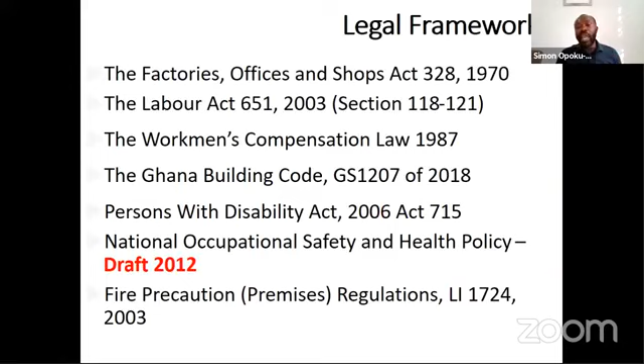So we are looking at that as being a basis for health, safety and environment in the country, where every company, every organization would comply. Yes, it's common law, it's statute law, and all that legal stuff.

It is your duty to provide a safe environment if it's a construction site. You also need to provide the safer plant, whether you hire or you own. And the systems and the working arrangements in terms of training, inspections, working patterns, and all that has to be thought through, because it is your duty.

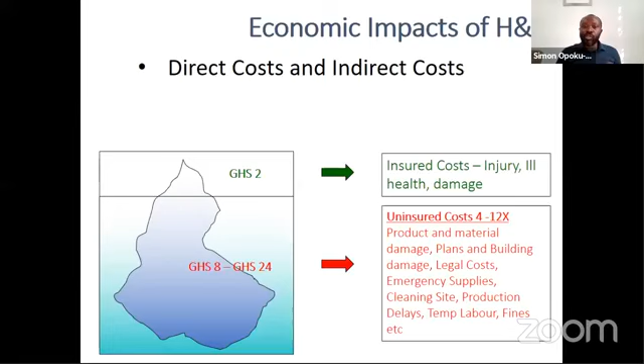So all these are part of it. In terms of the social cost, of course, nobody wants to work with a company where they will go and get injured. People will not feel happy, the morale will go down, and then you get people not participating or coming to your site regularly because they don't feel safe. As I mentioned, the corporate image, loss of reputation.

And just look at this from the business point of view: to promote effective incentives to improve health and safety within the organization, the cost of injury should be made economic, internal, variable, and routinely visible.

What we are all saying is that if we put this into our management, or if we look at the cost of injury as a basis for doing health and safety, it will help us to put this across if we are not senior managers or we are not the guys who make decisions.

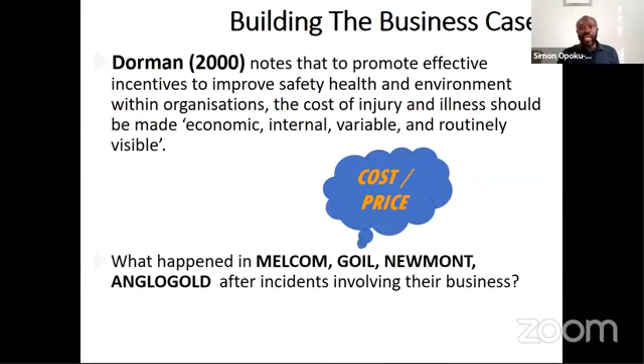And incidents that happen - Melcom, Newmont, GOIL - all these incidents had a lot of cost. And there was an incident in AngloGold where somebody died because they didn't put in place the good systems, and the court awarded 9 million Ghana cedis. That's a lot of money even if you put it in dollar terms.

And this took about 5 years to happen. Even though it was long and somebody died, and we don't want anybody getting killed on our site - how many companies will survive if they are supposed to pay this amount of money? And so it's something we have to look at.

If it gets to a time where a lawyer can pursue you because somebody has died on your site, or somebody has died as a result of your design, then this is something we have to look at.

It's also a business case we need to look at, because it's not only about chasing money or maximizing profit, but the importance is that we need to be able to avoid losses. And if you avoid losses, it means you are not taking money away and you can still make your money.

What is the goal of designing for health, safety and environment? The goal is that as a contractor, business owner, firm, engineer, or architect, how do you make sure that from day one, as you start thinking about your design, it is going to be a life cycle and sustainable objective, such that the emphasis is that your permanent design feature should eliminate or reduce hazards.

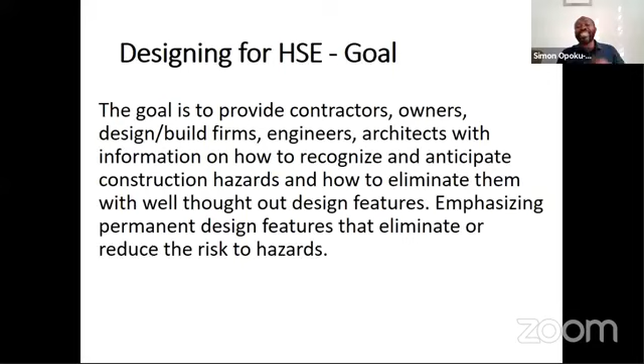And the hazards occur at pre-construction stage, construction stage, after construction when people are occupying your building, and as far as demolition. So we are looking at a process whereby you try to eliminate, let's say, falls. We'll go through the process where we know that falling from height and falls on a construction site is one of the biggest, or is the majority of accidents that happen on site.

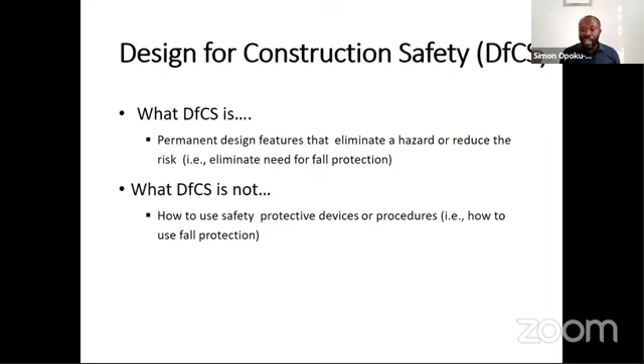So how do you make sure that the features that you put on your building or your design would stop somebody falling during construction, will stop somebody falling at the maintenance and repair stages, as well as will stop somebody falling when we need to demolish that property, maybe 20, 40, 100 years down the line when you are not even alive. But designing for construction safety is not about showing somebody wearing protective gear or PPE. Let's understand the various elements.

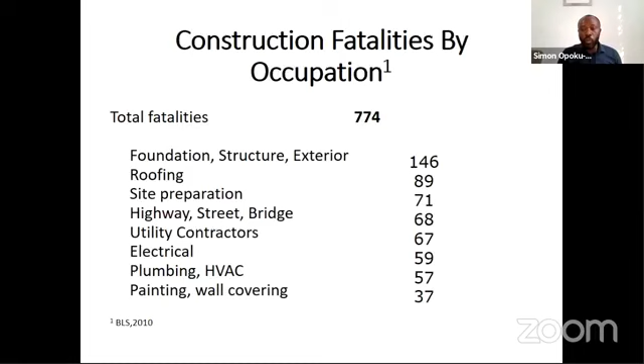So for conventional construction, design professionals prepare the plans and specifications to show that the building complies with the building code. So we have a code, and then we design such that we will be in compliance with what the law says we should do.

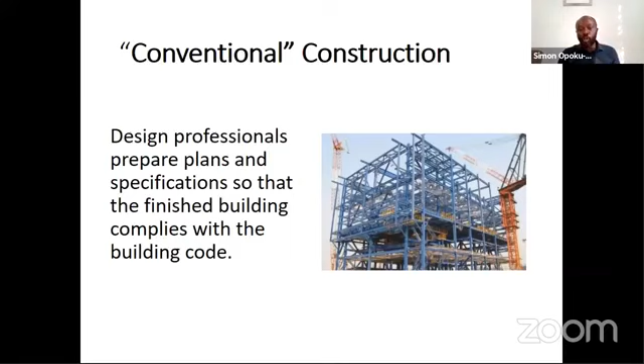Hazards are managed during the construction process, but little thought goes through the process after the owner takes possession. So when we design and build and hand over to the end user, the estate owner, the facilities managers, the company paying for your designs and construction - little thought goes through what happens afterwards. And I'm saying this with respect: every single hazard that happens after your design has been built can be stopped or avoided if you think about it.

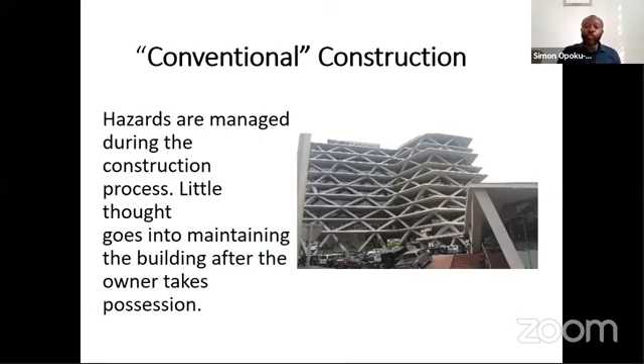So for a typical construction arrangement, the owner will contract various contractors. The entities would then either subcontract or give some of the work to various specialities. The project owners would contract some design firm to do both design or construction sometimes. The project will move fast and safety responsibilities are often blurred or neglected. That is the situation that we have here.

And so for a designer or architect, if you have already thought through safety in your designs, that means that every single specification, from procurement to all the various aspects of your design, would put responsibilities to specific people when we are on site. The process is addressing site health and safety and planning for future maintenance in the design phase of the project.

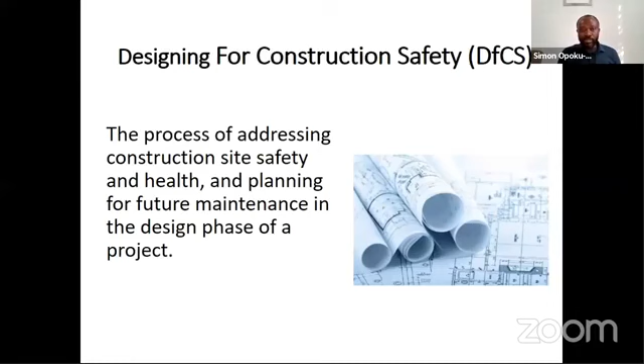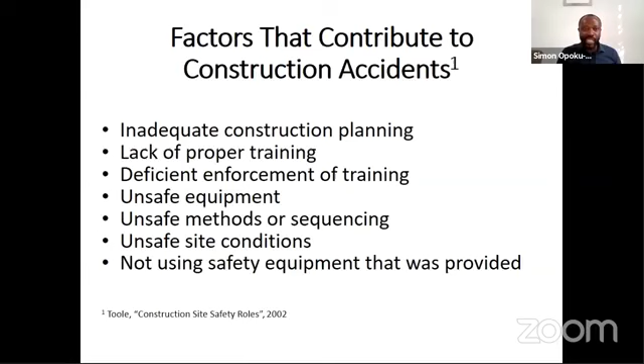Some of the factors that contribute to accidents on construction sites are these, and we need to understand when we talk about training and methods and unsafe conditions, because it is us. And if I say us, I'm talking about the design team, the architects, the people who lead projects. They have the bigger responsibility to make sure these factors are curtailed or eliminated very early in the stage. Where do we fit?

Considering safety issues related to construction maintenance facilities, designing out anticipated hazards. So you meet a client and the client is asking you for some things that are sometimes unbelievable. The way I see architecture and design, anything should be able to be built if we're able to put the various technology together.

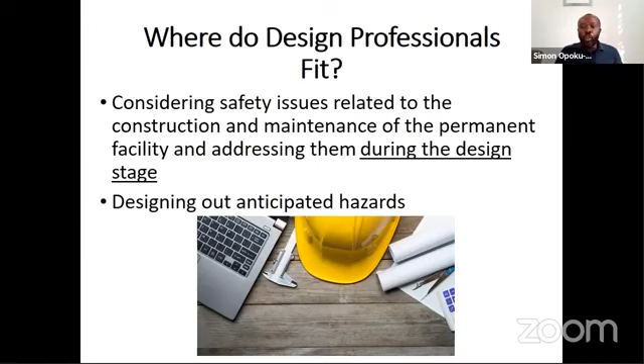But in that same vein, we need to look at how we can design out any hazard that can come from pre-construction, construction, maintenance and repair, and the demolition stage. So your job is to design out any anticipated hazard. And you can only do that when you involve safety professionals, or somebody within your team who can anticipate these hazards, review your drawings, and then you can design it out.

So these are the phases that I want us to look at: the pre-design stage, concept, design, development, construction documentation, construction stage, and project review.

If you break it down, you can see that you develop, you design, you construct or manufacture, you supply, you install, you commission, and you use it.

After it's been handed over to the end user, your job doesn't end there if you have thought about it, because these buildings and facilities are going to be maintained. Some of the reasons why most of our buildings in this country struggle for the look and feel, or how people see a building that is built very nicely and within 5 years we can't even maintain it, is because we did not think about the maintenance.

And every time we keep saying maintenance culture, it starts with architects, it starts with designers. If you think about how this building is going to be maintained, your choice of materials would be thought through and it will be chosen.

It will take some time, but every building at a certain point in time is going to be decommissioned, such that eventually we might have to demolish it because there is an activity, or because we want to change the area or whatever it is, or we have to do something to it.

At that particular point, you have to think about the materials that you used maybe 150 years ago and its effects whenever there's going to be a demolition, because the particles are going to be generated and it might be harmful to people at that time.

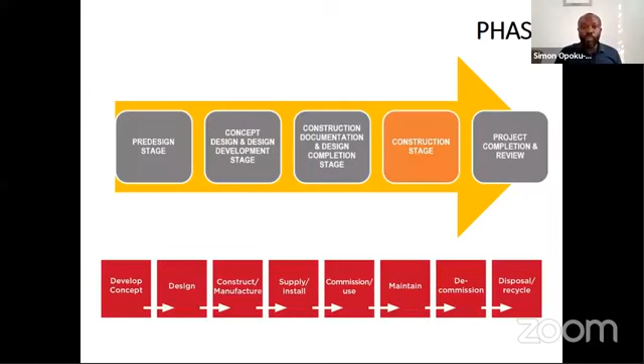So we've talked about this. We want to eliminate hazard. We want to design structures so that during the modification stage, we will look at how things could be done properly. Design output includes hard copy and electronic drawings, details and all that scope.

And specifications are very important, because when you specify, they will build it. That's one thing that you guys have control over. If you mark the line, if you specify, they will build it, as long as there is monitoring and oversight.

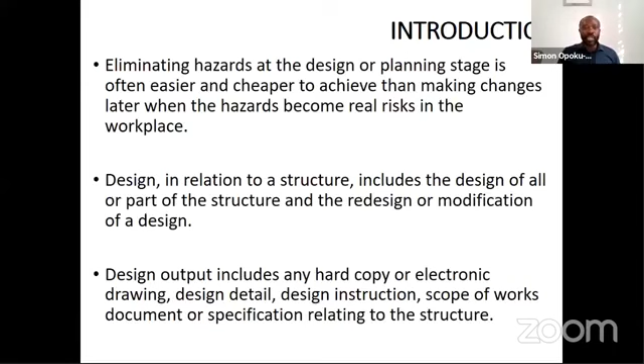What are the benefits of all that we are talking about? More effective prevention of injuries, improved usability of structures because people will be able to adapt, improve productivity, reduce cost, better prediction and management of production, and then innovation.

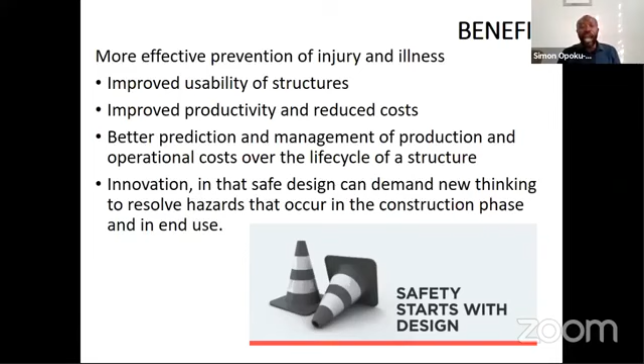This gives us an opportunity to innovate and start thinking outside the box, because the very few times that I've presented this to a group of people, it gave them the opportunity to look at how they do their designs, because every single line, as I've said, would be reviewed and it will be checked for safety and how you place your spaces.

We've gone through this - who is a designer? I remember back in the days we started off as BSc design, and then we ended with a BSc architecture. But the design profession is not only for architects or people who hold the pens and the pencils. We are looking at anybody whose decisions and ideas and activity affects what we build.

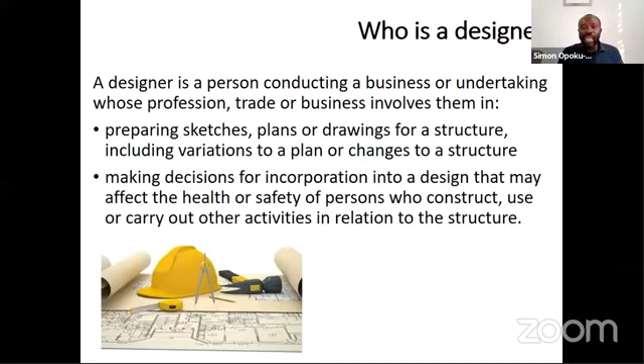So procurement entities, quantity surveyors, any single person who has an input in that process is a designer. And so we should be mindful of that.

So if a client were to propose a specification for, say, an installation which involves installing a component that has a high risk, that was reasonably practicable to adopt.

This is a scenario whereby your client is asking you to do something whereby you know very well that it is risky, the hazards are high, it will not be good for the environment in the long run and all that stuff. It is your duty, and I'm saying this again, it is your duty, your integrity, your values, your ethics, to be able to not just chase the money, but to be able to advise and encourage this client.

And every single time I speak to my colleagues and my friends, architects, this is something that we are battling with: how do we encourage and compel our clients, not looking at whether the client will go away, if we can design to solve the real problems in our society?

If we as architects and as an association can look at that as an area where we have a challenge, then our industry will be good. People will start trusting architects again and see that our job is very important. So it's our duty to tell the truth and encourage our clients—some very difficult because they hold the money—but to let them know this is what has to be done, this is the right way. If you don't want me to do that, I'm not part of your design team. Can we do that? That's the question we need to ask ourselves individually.

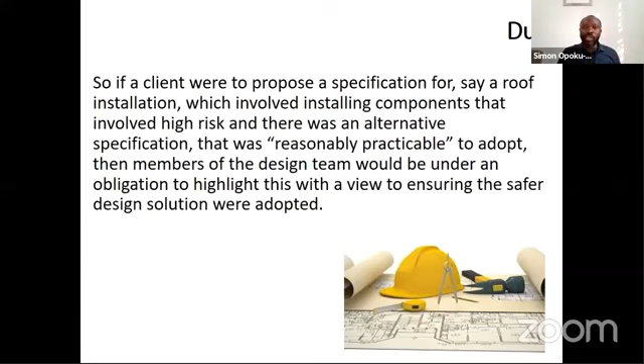So we are all thinking about the life cycle—planning, construction, and maintenance. It's a life cycle of your design that is very important, because in the end, even if something happens, look across. I'm in Kumasi, and if you guys have been there, come and see the type of building that's going on.

Without people knowing whether architects were involved or not, they are blaming architects. And I can't shy away from it, because from the legal point of view, or from the standards, or whatever the Metropolitan Assembly has made us aware, before a building can be approved, there is always a stamp by an architect on it. So unless I am wrong, with my opinion, every single building in this country that has a permit has been approved by an architect. So we cannot take ourselves out of the system.

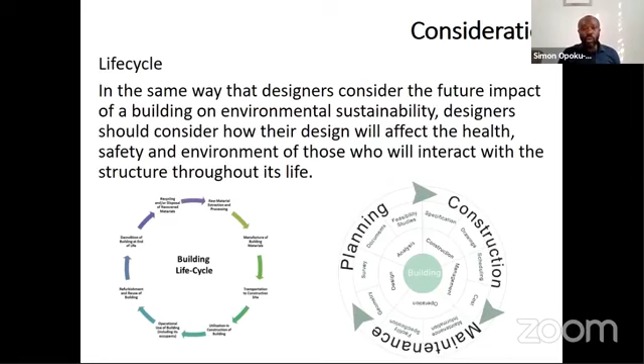But that is another challenge the Ghana Institute of Architects has to pick up within their long-term goals. At the pre-design stage, we look at consultations and research, identifying the purpose of the structure, the risk, how the design and its discipline, the competencies and people involved, the roles and responsibilities, and how we establish relationships with clients and others who influence the stage. So before you even start thinking about what you want to put on paper, you need to consult people whose designs will be affected.

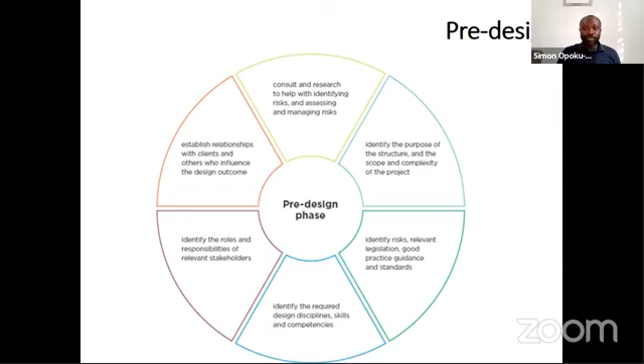I know this gets done, but here we are talking about how you bring people who can understand safety and the environment into your design team so we can design for safety. So we think about the design and its intended process, materials to be used, methods of construction, maintenance, operation. Even before you design, you have to think about how your design will be maintained, demolished and disposed of.

That's what I keep stressing, because that's all this is about. There are so many accidents and incidents on buildings and facilities because we did not think about how this is going to be maintained or disposed of if we break it down. So we talk about establishing the context, identifying the roles, and conducting consultation and research so we can identify these hazards and assess the controls.

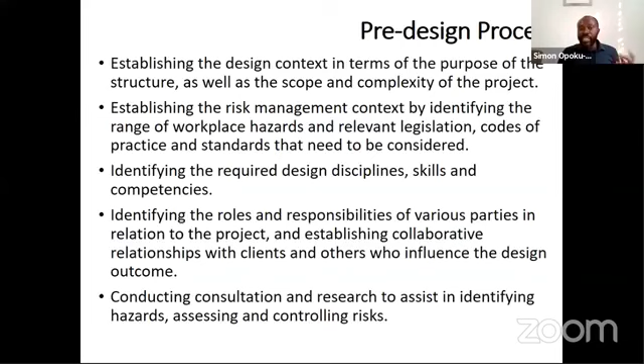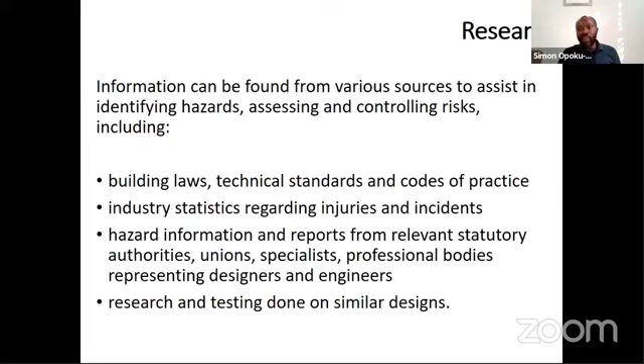In terms of consultations, we need to hold various activities that help us identify risks. When researching, there are laws, industry statistics, hazard information, and research. With the internet and journals across various platforms, we cannot afford not to be well informed about this subject, because it is being practiced in jurisdictions we admire. So if we want to set ourselves apart from other professionals, these are some of the areas we look at.

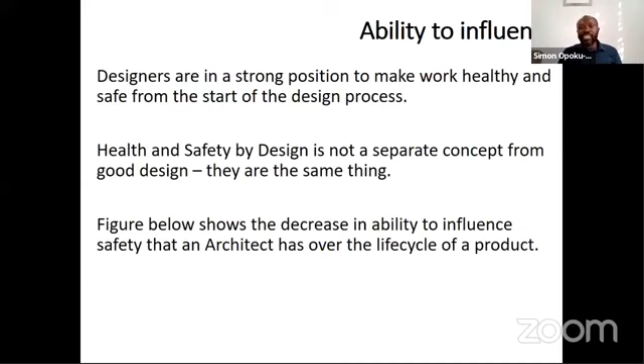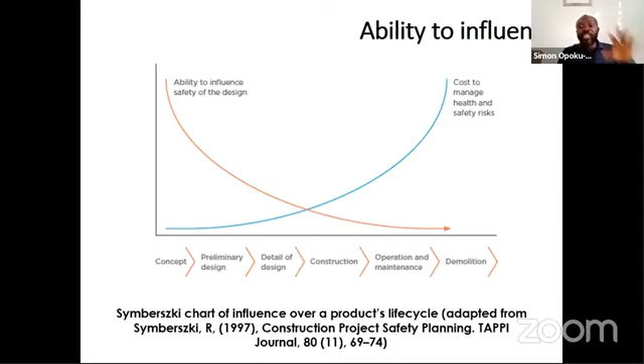The time you have the ability to influence keeps decreasing when the costs start going high. When it gets to the demolition stage, where you want to demolish this property which has been built over the years, if you are going to involve experts to think about health and safety at that time, your cost is going to go sky high because you've lost the ability to influence. So I keep saying, you guys have the strength, the power, every single ability to influence safety in the design.

So these are also some of the things we are looking at, and examples are that you are going to check the site. This is also something I want to mention: supposing a client comes to you, he or she has bought a site, and you know very well that this site is not good. What are you going to do?

We've seen people building in various sites and areas whereby eventually we keep saying it is flood prone and all that stuff. But these are designers and architects who are helping them build. We may say that sometimes clients pick their designs and just go and get their buildings done, but it is our responsibility to be involved in the process.

How are we going to make sure the dynamics of the family we are providing for is being thought through? Because people are going to get older, transition is going to come into place. If you put up a building with only stairways and no adaptability for when they get older, how do you make sure these people in old age don't need to climb these stairways and can still make use of their property?

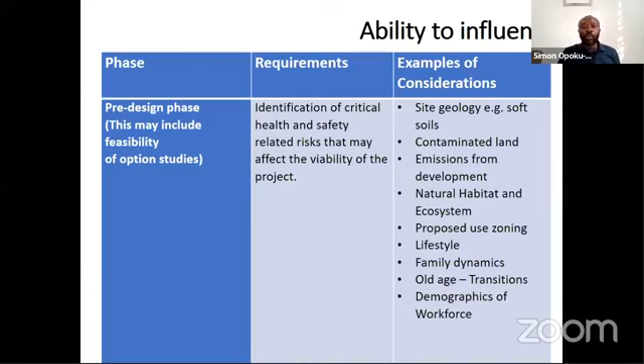These are some of the things we have to look at. If you are designing for a workplace, you need to understand the demographics and how your building can influence how people work, the procurement entities, the choice of materials, how we select our consultants and contractors.

How do we ensure health and safety design and expectations are being met? The materials we choose, the suppliers we choose - are we only going for the aspect of it being cheap or available, or are we going to think outside the box whereby our procurement and how we buy products and equipment can help us achieve this?

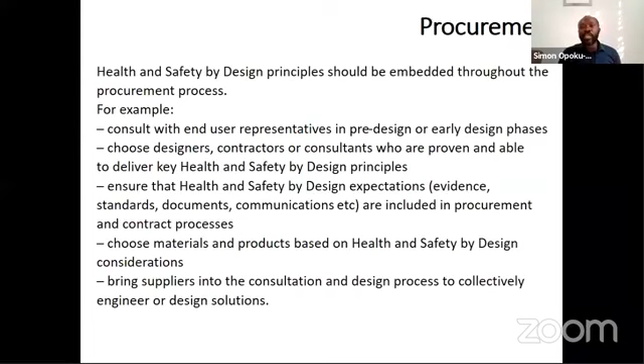We have to go through this risk analysis as well, and in that analysis this is where we can identify certain aspects of what we are talking about. It involves holding a lot of workshops and programs, on-site assessment, research, workshops.

And if we're able to use building information modeling, which has also been popular within these few years across the globe, it will make life easier, because supposing a design person or a safety person is within your project, every single action you take they will see it live, they will advise, and then we can take it off as the project goes on.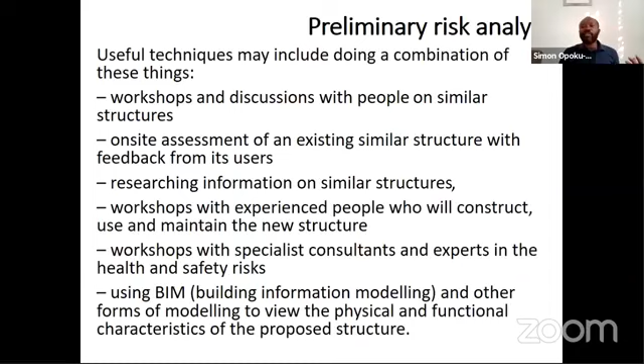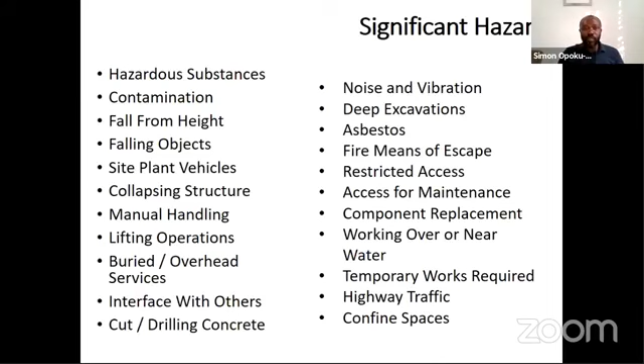Of course, design activities include setting up sites, and every single activity on this list would come up with a specific hazard, and these hazards would have to be risk assessed and then measures put in place such that we do not get accidents and incidents. I keep mentioning accident and incident because that is the resulting effect, and if you can identify the root cause at the early stages, it means we wouldn't get there.

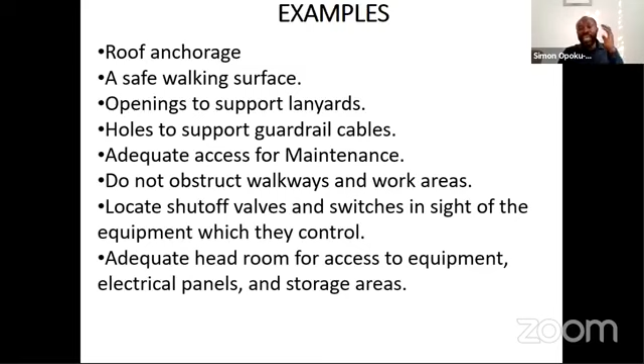Let's look at some examples we would be able to incorporate if we start thinking about this practically. So we will look at roof anchorages, safe walking surfaces, openings, and all that stuff if we want to be able to incorporate this. I'll go through - there are pictures which I'll show, which will list all these things.

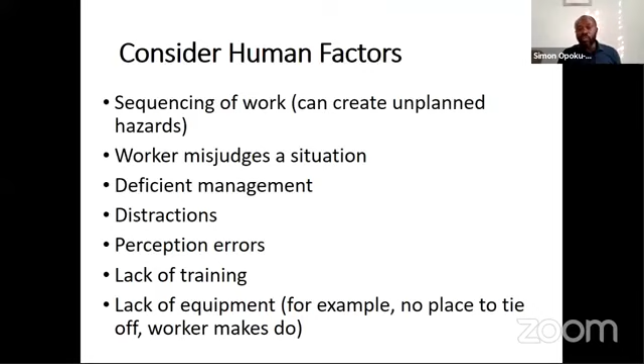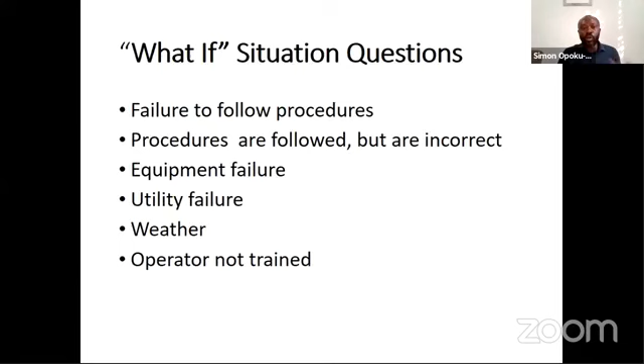So the first step is we need to identify the potential hazards, consider all the various human factors, sequencing of works, distraction, lack of training during your construction, and do a what-if analysis. What-if analysis will come up with failure to comply, utility failures, weather, and these analyses will also let us know, if we look at highway construction, what if workers have to access the drains?

How do we design that out? Are drains a possible confined space? If so, how do you design it out? What about the power lines? What about worker and public injury from traffic accidents? How do you organize your work and site such that you can design it out? Do trucks have enough turning space?

Because sometimes we force ourselves onto construction projects whereby these things happen and become afterthoughts. If we start thinking about it at this very early stage, then our construction will be environmentally, health and safety accredited. Will construction vehicles have enough shoulder space to be able to stop on the road?

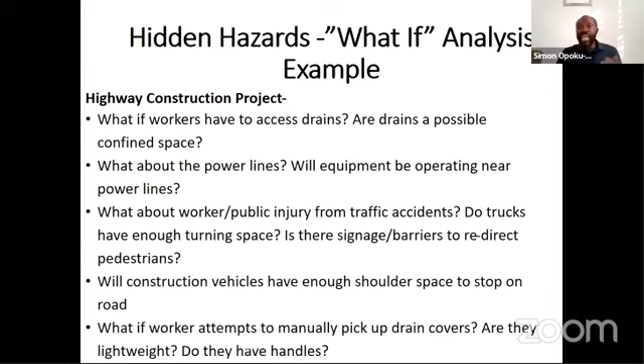What if a worker attempts to manually pick up a drain cover? We all know there's a lot of manual work that happens on our sites. This tells us that the choices and specifications we make need to consider the weight, where workers are going to hold it, and how the design is going to look. It may appear as if I'm asking so much from designers, but this is the right design. This is good design, because designing for safety is no different from good design.

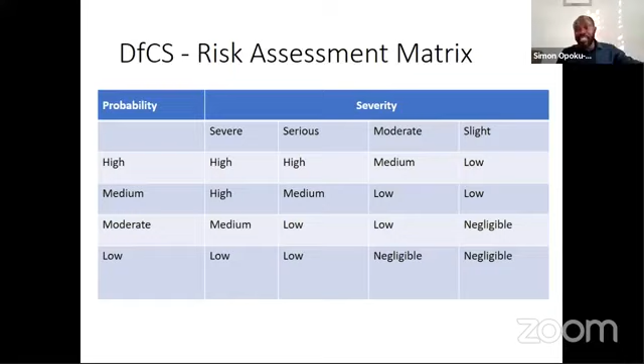We assess the risk, and we can assess the risk against the probability of it happening and its severity. All these modules that I'm talking about have their own specific courses that we can eventually go through when the time comes. And then you apply the hierarchy of control.

What this concept says is that at any point in time, if you can't design it out—so the first point is, every single hazard that you see, try and design it out. Use your initiative and innovation to kill out the hazard. Don't let it happen with your design. Design it out. If it is not possible, use something else. Find a substitute design. Think outside the box. Look at something else. If it is not possible, then you look at engineering controls.

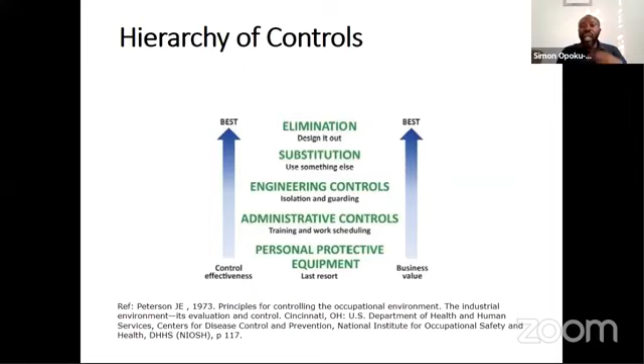How do you isolate the risk, or put in guarding measures? There's also administrative controls, where training and work scheduling can help. The last bit is PPE—personal protective equipment like high-vis jackets, helmets, safety boots. Over time, when somebody just provides staff with PPE, everybody thinks that's health and safety. No, it is the last bit that has to complement the four others we've talked about. So if you are thinking about PPE from the early stages, it means you are not doing the right thing. Try and design out the hazards before you give the person PPE.

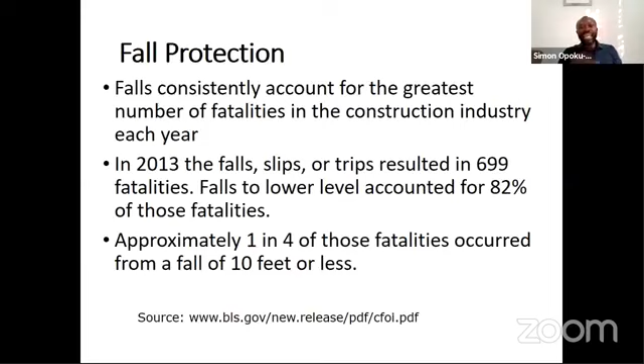So let's look at fall protection, which accounts for the greatest number of fatalities in the construction industry—the majority of people dying on site because of how construction involves going high or going deep. Whenever we talk of falls from height, people think it's only when the building is up. Not necessarily—if you excavate, once the excavation is deep, anybody on top of what we'll call the ground floor is also working at height, and they can fall into the excavation.

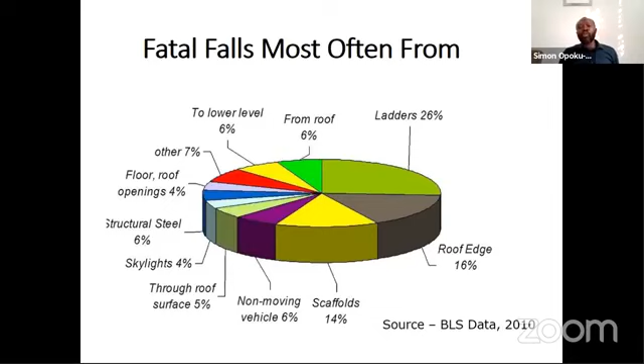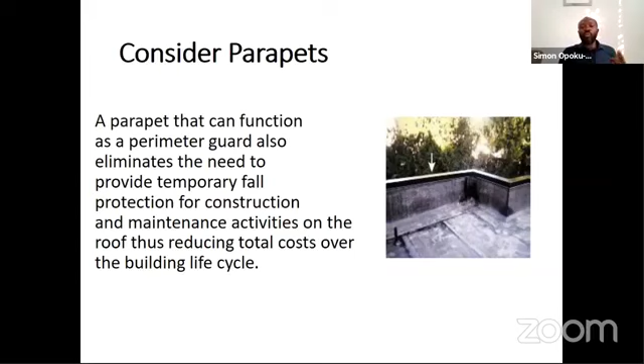So it's something you need to think about if you are working within those places. In terms of falling from height, consider the parapet. If you think about it, I believe it's very much available and something we do—sometimes people do it without even knowing the reasons, but I know definitely why we do that. It provides protection, not just adding to the facade, but when somebody has to go to the roof for maintenance, it can protect them from falling, because wind patterns can affect people working on high-rise buildings. This can also reduce your overall cost.

Another way of doing this is also specifying window sills at heights that can help you, acting as temporary guardrails.

And so if your window sills are already built, you realize that when people are working along your construction site, they are safer because there are no open spaces, and it would avoid people falling.

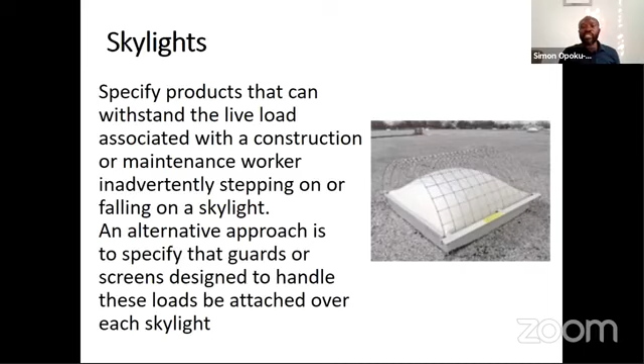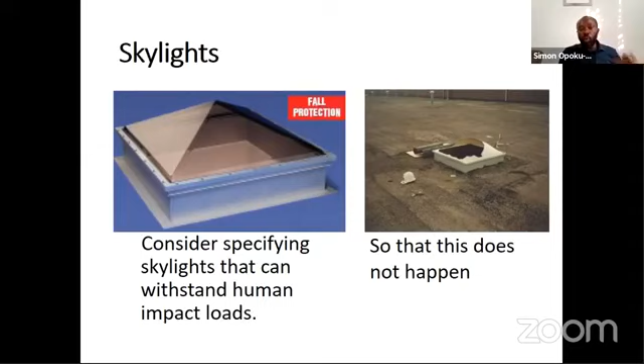Skylights. If you are going to put skylights into your designs, you need to think about how this is going to be maintained, because this can happen. If you look at the picture on my right, somebody can just fall through and they can die, or they could be permanently damaged. So why not consider things that can withstand human impact or loads that will be placed on those skylights?

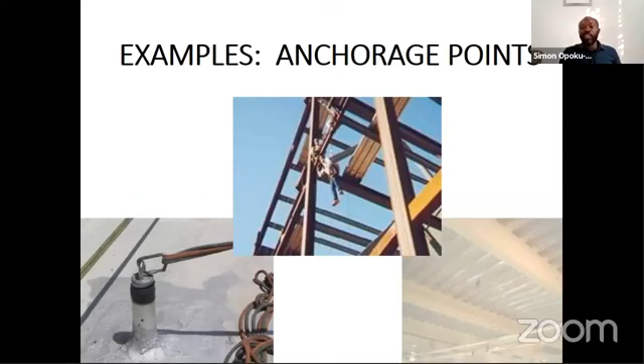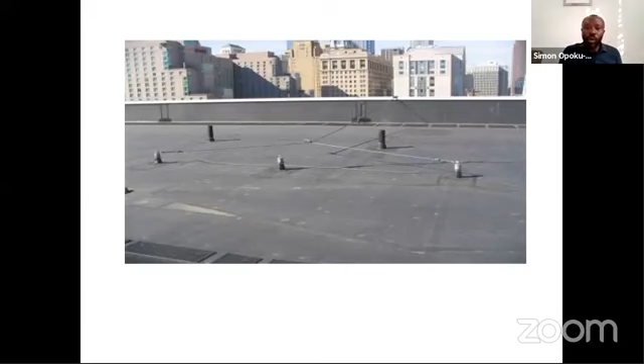I talked about roof anchorages. Of course, these are the ones. Every single roof that people can eventually go and work and maintain, because the air conditioning and services are placed there, we need to start looking at these type of designs, because you can then hook your safety harnesses and lanyards on it such that you will not be blown away, or you will not fall off the roof. It can also provide points for us to tie these things off. Obviously, this picture is foreign, but can we think of, if we are designing our roofs, these permanent anchors that can be incorporated at various areas so that we can avoid people falling because they've been able to hook themselves up to safety.

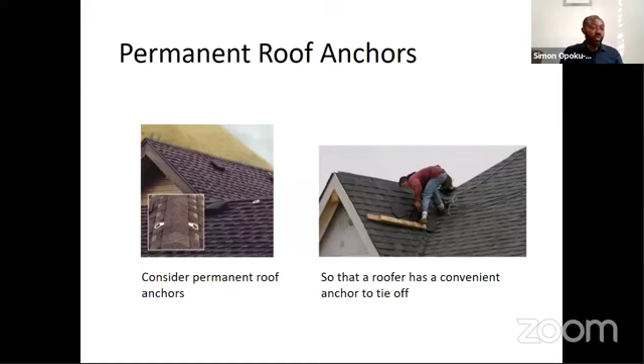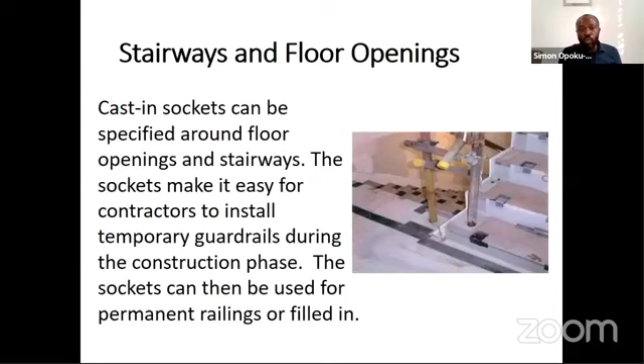The same way, floor openings, incorporating steel plates so that you can avoid things that can cause accidents. Falls through roof. If you know that materials are going to be stored on the roofs, you need to specify structures that can support the dead loads. And it is very, very important.

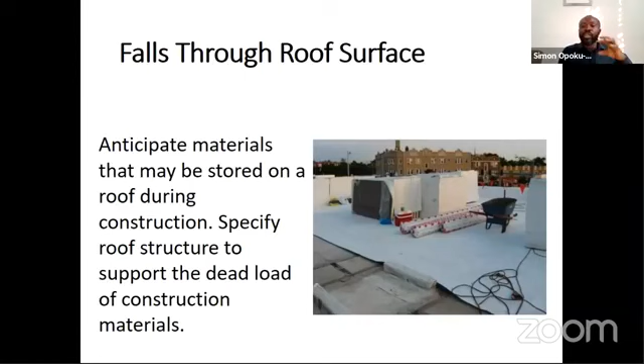And this is where I think structures come in. I mean, that's also a whole topic within my architectural career, where structures was a no-go area. I could not understand it. But over time, we've come into grips with it, where we are dealing with structures. And so if you can design this as part of your design, knowing very well that when they need to go maintain this roof, they are going to keep certain materials and equipment on the roof, then it would help to avoid the roofs caving in.

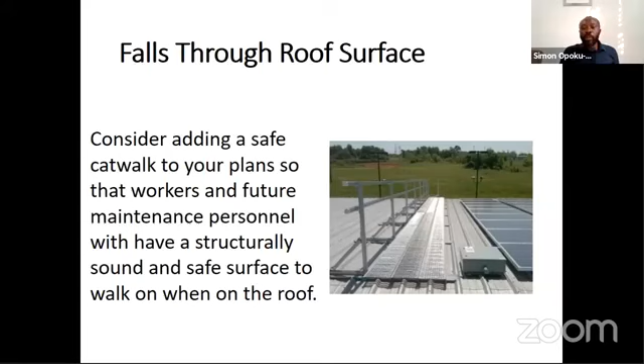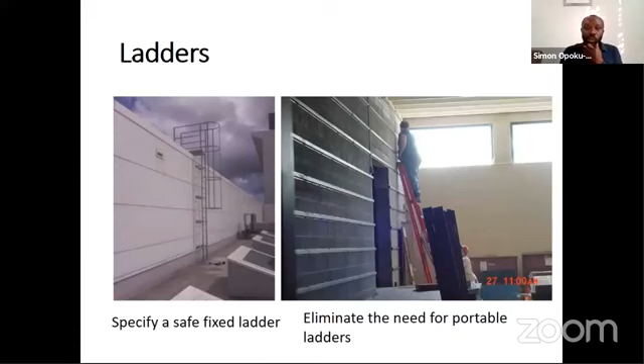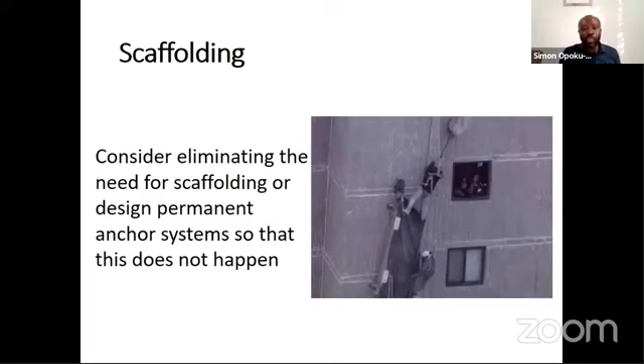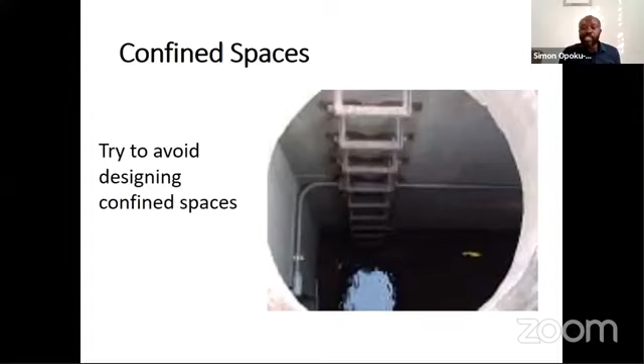Also, scaffolding. If you can consider eliminating the need for scaffolding by designing anchor systems such that we would not need to put up scaffolding that will increase the risk, then that could also help. Same way, avoid confined spaces. If you know that your designs can avoid confined spaces or people going into deep spaces, then it is something you need to look at to be able to design it out.

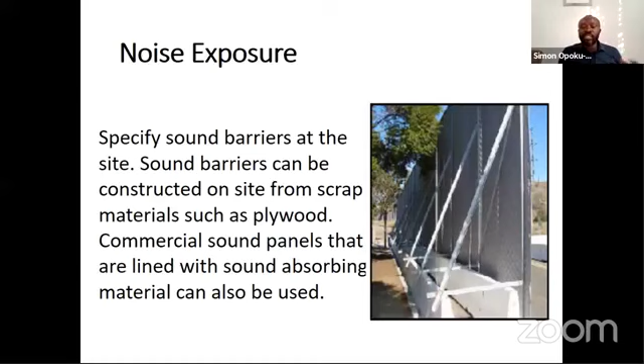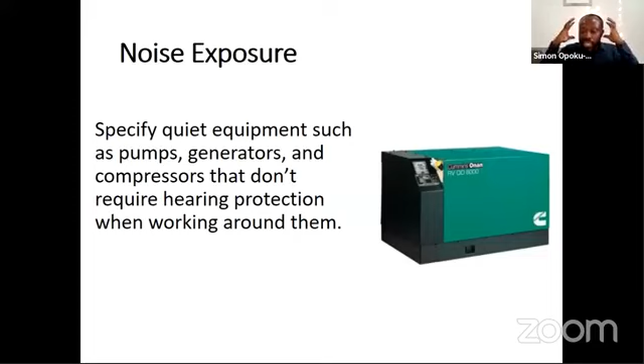Noise exposure. If you are specifying equipment within your plant rooms and within your spaces, look at the options that could be more quiet, because other than that, then you put in the plant and then people have to wear ear protectors and all that, which is also added cost to the operations.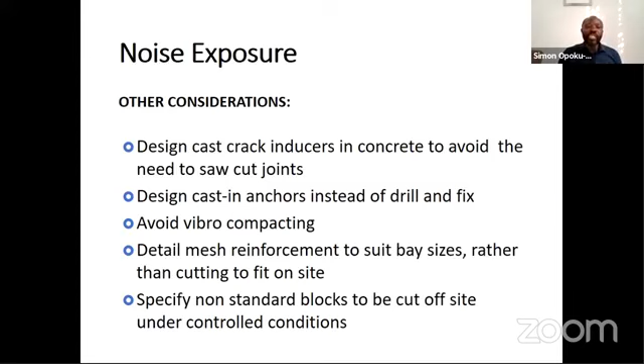Design such that vibration hazards would be avoided, and the same goes for fumes. Specify hazards and chemicals that do not contain elements that can give cancer or other harmful sicknesses.

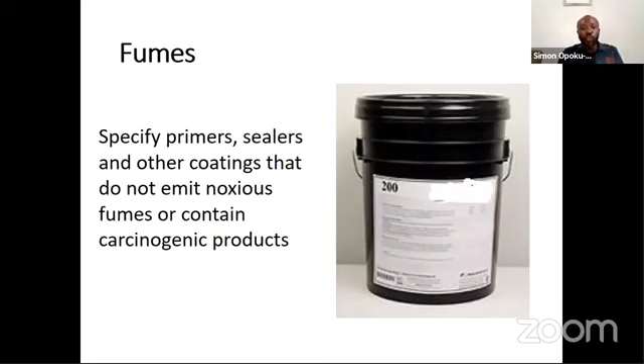Your choice of materials within the times that you are procuring is very important, because sometimes when you need to repaint and remove old paint, the hazards are not at the time of painting but at the time of removal, where particles are generated. You need to look at the hazard sheets, the safety data sheets that come with these chemicals.

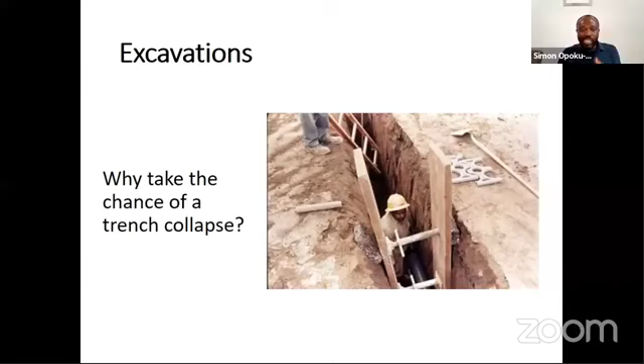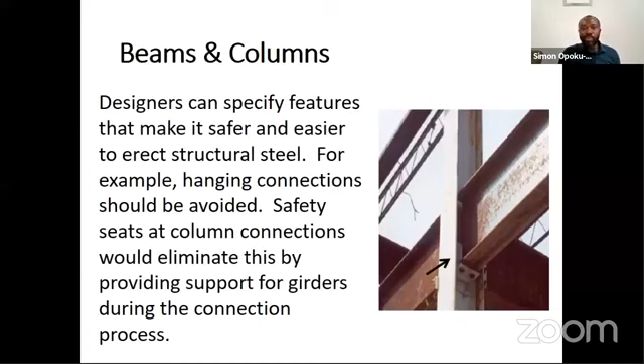That will help you make the right choices for your designs and buildings. For excavations, think about how you can avoid them if the technology is there, because this is dangerous. For beams and columns, think about how you fix them. If you already design the detailing such that it will make life easier, think about it.

People are going to lift blocks. If it is structurally possible, why can't we specify lighter building materials or building elements? Because we know people are going to lift these blocks, reasonably and practicably we can design this out so we can avoid manual handling and strain. The majority of our workers constantly complain of bad backs, neck injuries, and all that.

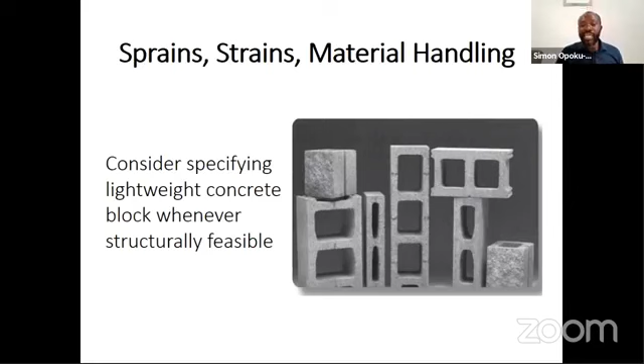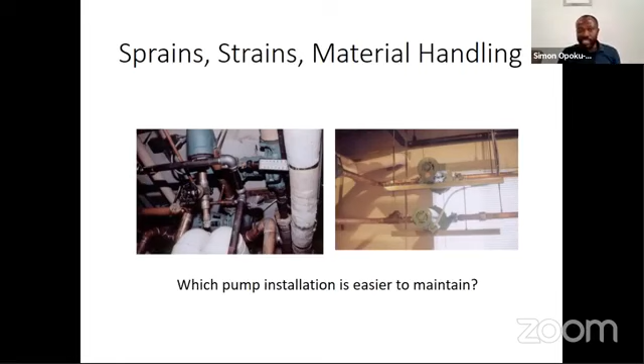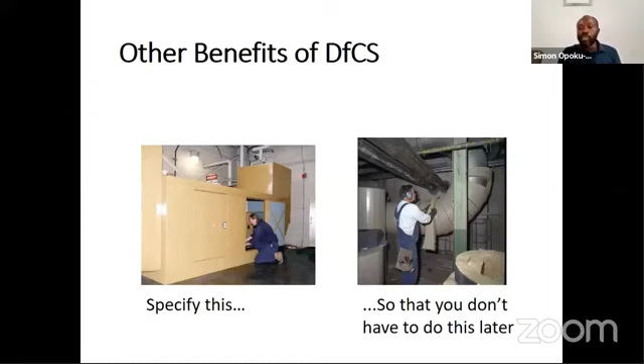How can we avoid people working in cramped spaces like this instead of this? On the left hand you can see the place is cramped, and on the other side it is easier to work. Positioning of plants, quieter equipment - somebody working on the left has it easier, while the other guy on the right has to put systems in place because his plant and equipment is noisy.

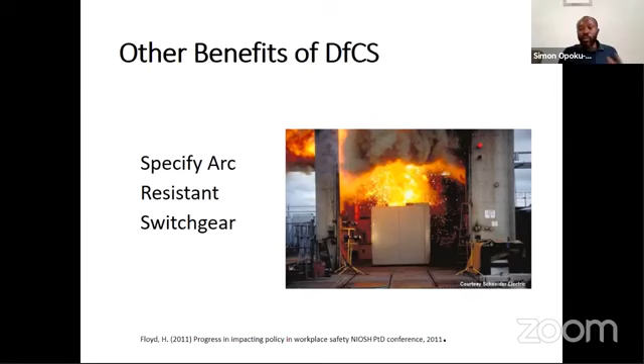Specify resistant materials and resistant equipment such that when there's a fire or an accident, it can resist it.

I also want to touch on COVID-19. For me, as a safety person within the built environment, COVID-19 has presented a challenge that I'm embracing, because for the first time, I'm very happy that even the market woman is mentioning health and safety. Every single person has been aware of our actions and inactions and what can happen, even though we know there are people who will not conform.

This era has brought a lot of changes to how people think is normal. As interior designers and architects, there are new layouts and modeling that will change the way we design, because we need to design to minimize the spread of diseases. I'm saying this knowing very well this is not going to be the only pandemic or virus that will haunt us.

We should be aware that another one will come. I'm not a prophet of doom, but it will happen. Our designs have to stand the test of time, whether we are alive or not, and be able to minimize this spread. Knowing that people will be working from home much more, we need to start looking at how our households can accommodate working spaces.

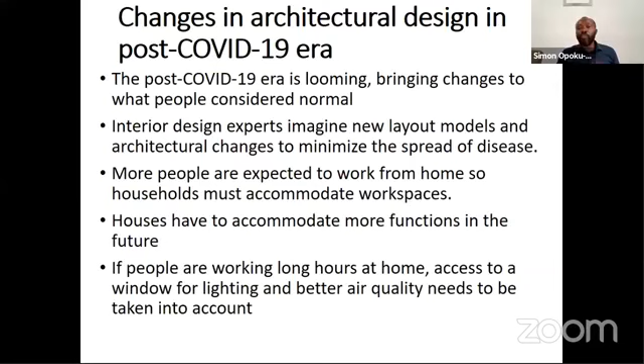Rooms will need to have multiple functionalities in the future, because even today, as I speak now, I had to run out from the office because of whatever is happening, come back home and do this presentation. This is going to happen, and a lot more people have seen this, such that if you did not plan, or don't have a plan for your space that could be used in this way, then you are going to struggle.

We all know that people are going to be hesitant in terms of how they enjoy social life in public. So are we thinking of how we incorporate spaces within the working environment or within private homes such that people can still enjoy their social livelihoods in those spaces?

Offices are going to get smaller because more and more people will be working from home. When I was speaking to Ruth this afternoon, we talked about this webinar. I think we were trying to do this face to face, but this is presenting us with an opportunity where we are reaching more people and it is working.

In future, we are all going to realize that we will do more Zooming, more Skyping, and more online stuff. So we need to start looking at that in terms of our design and the elements that we put in place. There's also a need for us to think about how the outside and the inside environment incorporate.

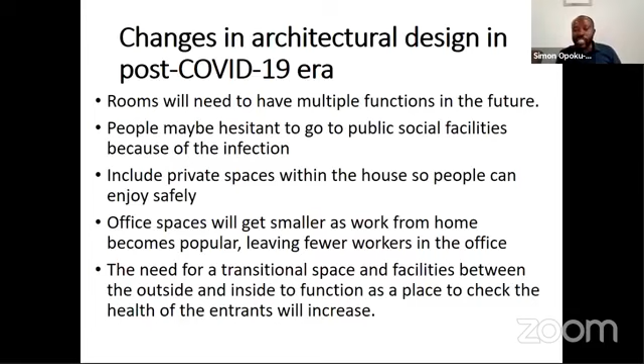Classrooms, seating adaptability, restaurant seating adaptability, physical distance analysis. How are we going to make sure that whatever we design, even after COVID, can still be adaptable when we get a situation whereby maybe 6 feet will not be enough?

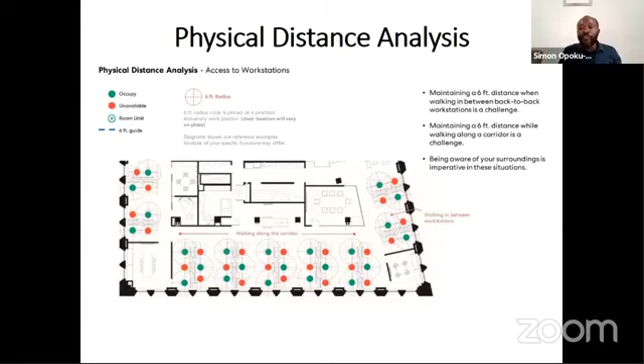If we ever get a situation whereby we need to adapt our working environment into 10 feet, what are we going to do? Buffer signs and barrier treatment areas within our spaces, spatial versatility, which is very important. Are we going to be able to do that if we leave certain spaces or certain areas within our designs? It could be used for other things when the need arises.

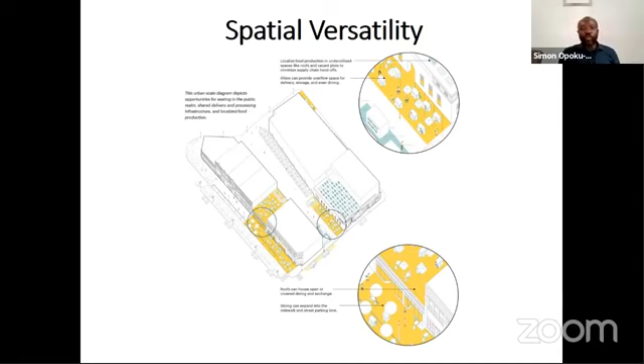Let me leave you with this. As a professional in a business, the health and safety and well-being of your employees and stakeholders must be central to everything you do. Your general business principle and values must be committed to providing a healthy and safer environment for all.

I believe that as an architect and as a business person, you can set yourself apart if you make health, safety, and well-being an integral part of your solutions to your clients and customers, if you are able to encourage them to buy into what you are presenting, what you are selling, and what you are designing and the drawings that you are doing.

Thank you very much, and I am very happy that this was able to happen.